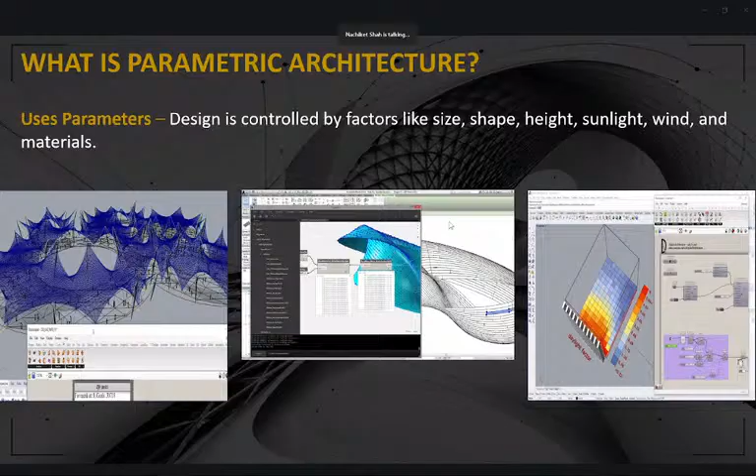So these are basically parameters, and the word itself says parametric. So the use of parameters to function or to optimize my design is what parametric architecture is all about.

Second, what parametric architecture basically uses: it uses rules and algorithms. Now, what are rules and algorithms? For example...

The rules and algorithms work in a way like: from the southern side, if my temperature due to sunlight causes the interior temperature to become 36 degrees, then my model, or let's say the facade, should be designed such that it blocks the sunlight, so the interior temperature should be sufficient and comfortable. That is what rules and algorithms are all about—a step by step series of orders which we give to the model or the trained model that we develop.

This is one of the most key elements, wherein we generate our own rules, we generate our own algorithm to create, optimize, or automate the design. This is the power and function of parametric architecture.

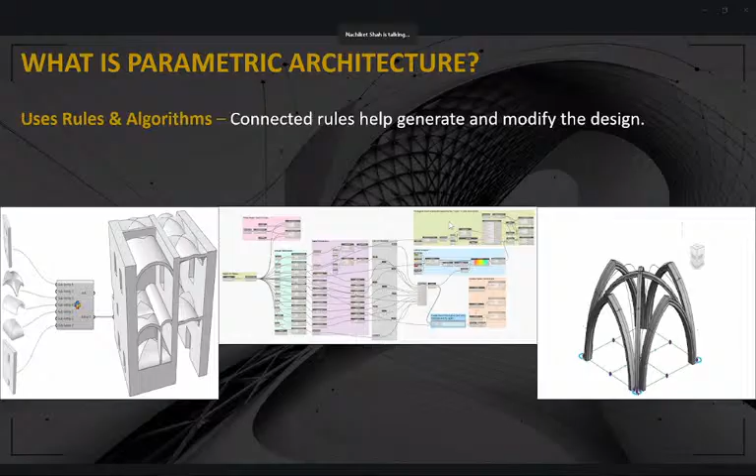Quite fine designs, right? Wonderful, brilliant designs. This can easily be done with the help of parametric architecture, where changing one parameter can change all the other elements.

You can easily see, in the fourth image, the circles. The dimensions of each and every circle are not similar, and the glass facade inside the circle is also not the same in each one—it's not a circle but an elliptical or oval kind of shape. So all the circles or shapes are not even similar; they are basically irregular shapes.

So what do you think—was each and every shape, each and every circle or oval facade, created individually by hand?

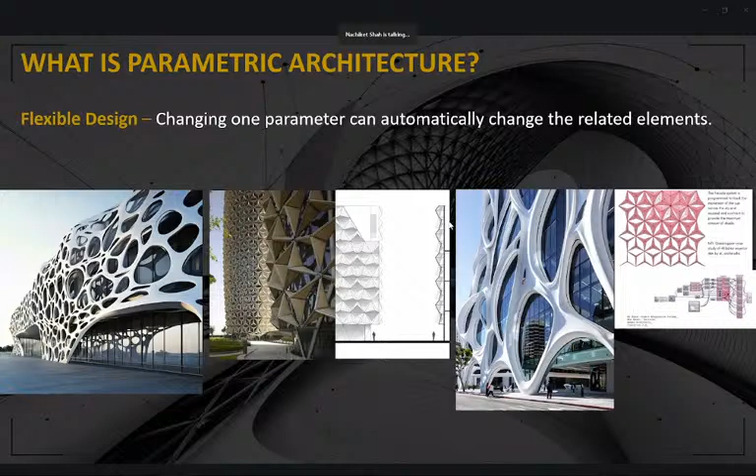Again, it helps in creating complex forms, fluid geometries, aerodynamic shapes. It could be easily served with the help of parametric architecture. So this is what parametric architecture can do basically.

Now this is one of the most key important things, wherein parametric architecture can respond to the environment. Design can adapt to sunlight, climate, wind, views and site conditions.

For example, if the wind is coming from the northwest region, and let's say I'm creating a skyscraper, the flows would be exceeding the 57th floor. You can assume the wind speed at the 57th floor would be much more. So much more structural conditions would apply there, or structural precautions should be provided in that case. But with the help of parametric architecture, we can give an aerodynamic shape due to which the winds can easily pass through without affecting the structure.

At the same time, there's one building in Abu Dhabi, known as the Al Bahar Towers. I'll quickly show you that building and then we can come back. This tower is basically made in such a manner wherein it can collect the sunlight or invite the sunlight from inside the building. This is a live example in front of us, showing they have started using parametric architecture just to suffice their needs. So this is how it responds to environmental conditions.

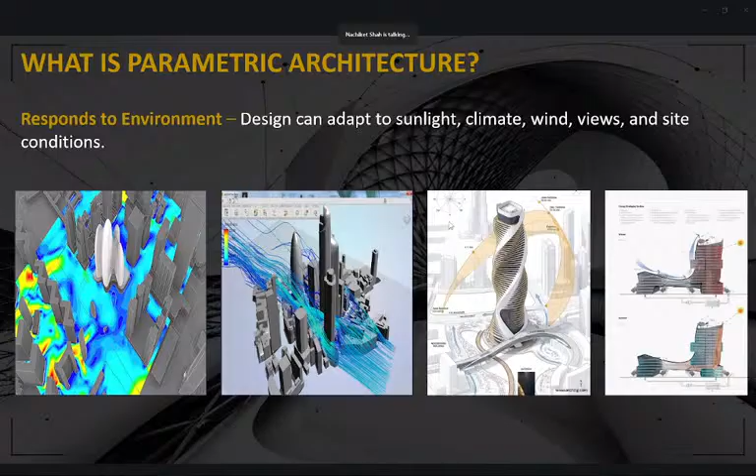Parametric architecture, what I believe, is a beautiful use of space. For example, if I want the optimum use of space, I can easily do it with the help of parametric architecture.

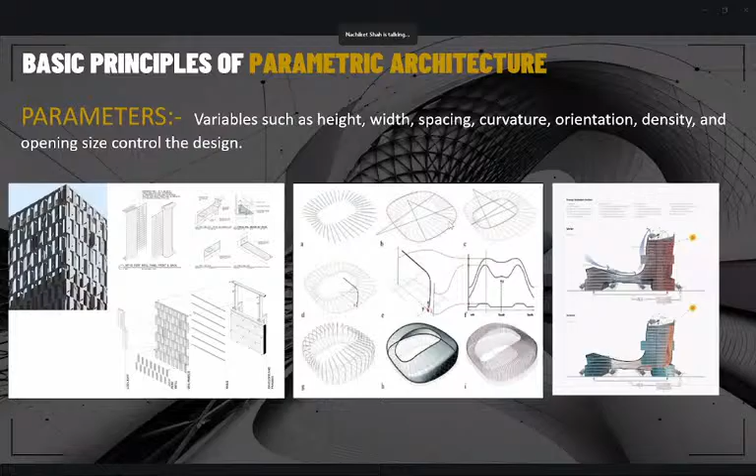So this is the basic thing of how a parametric architecture or this different set of design is being created or curated. Second, we have the relationships. This is what I talked about: the mathematical relationships or algorithmic design relationships is what we can call that.

We have a question, I guess: please describe the density in design.

Density in design, as far as architectural design is concerned, could be in the structural members, whether the panels of the facade, the openings, or shading devices. For example, if the density is higher, more shading fins or smaller openings are provided where solar radiation is high. Where there is lower density, fewer elements or larger openings are used where more daylight and ventilation are desirable.

So density in parametric architecture is very intelligent in terms of distribution, when there is a high density and when there is a lower density, spaces being formed. It can easily be controlled to create spaces which respond efficiently to the environment, and at the same time be efficient in providing the functionality of the space, along with the structural and aesthetic requirements. I hope this answers your question, sir.

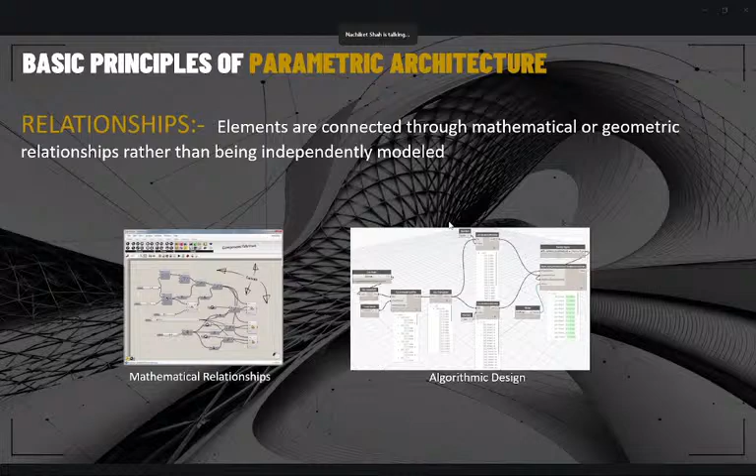For example, the beam is in relationship with the column, and the beam is in relationship with the wall. Of course, I'm not talking about load bearing walls or other types of walls. So this is the essentiality of relationships in architecture, or in parametric architecture, that is important.

So again, we would be talking about what algorithmic design is all about. It is similar, wherein we can create step-by-step geometrical relationships or mathematical relationships which are modeled together rather than modeling it individually. We can always model it in one go. So this is where the optimization of parametric architecture is all about.

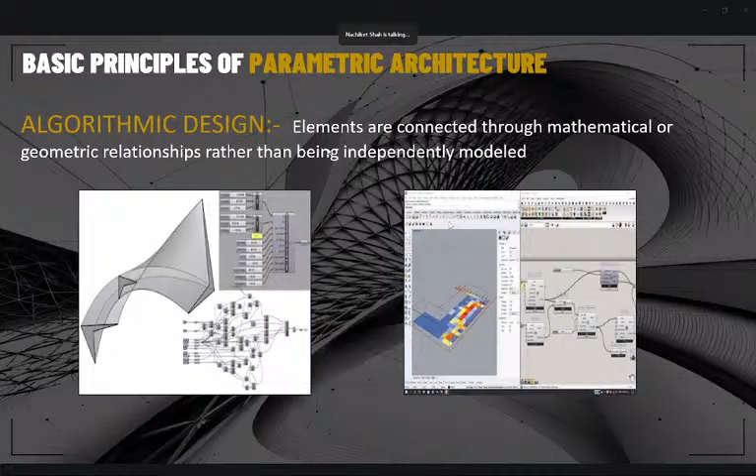Again, now we come to optimization. This is one of the most important things, and architects, civil engineers, and real estate developers are very keen on this optimization, but people are not using it widely in Gujarat.

But we can also get multiple design alternatives automatically in a fraction of minutes. I have created an algorithm which consists of rules and parameters. So just by changing the values or the rules, or adding new rules, I can get a complete new design. This is how we can get multiple design alternatives.

This is what every architect or designer needs, since clients always ask for more and more. So this is where optimization, wherein multiple design alternatives can be achieved, comes in. It is always said that if I don't know what is more, I can't acknowledge what is best. This is what I can do with the help of parametric architecture.

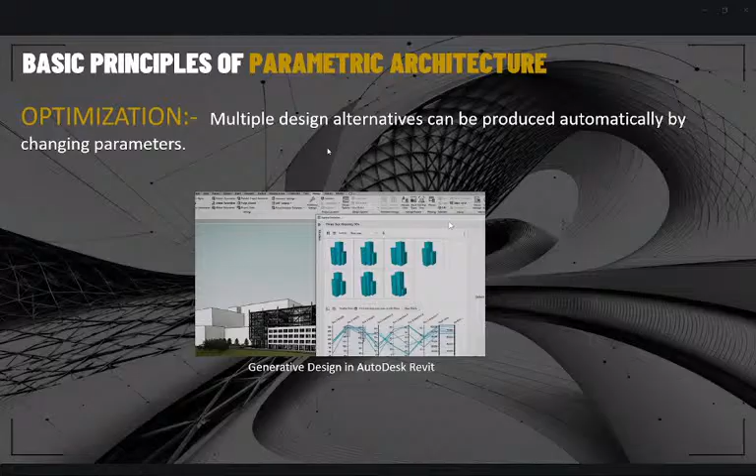So again, we have associative modeling. For all the structural engineers and civil engineers in the house, whether they are related to the AEC segment - which stands for architectural, engineering and construction - or from the PDM segment, which stands for product designing and manufacturing, all are in need of this.

So I would urge all the professionals and students in the house to switch to parametric architecture, because this is something wherein you can automate your drawings rather than doing it the old way.

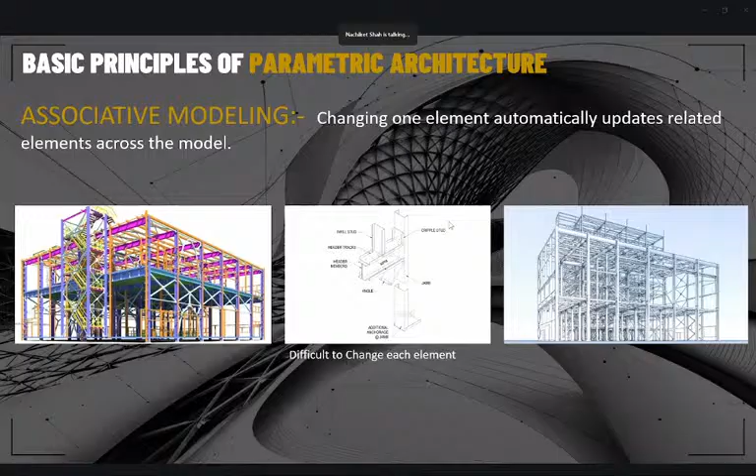Okay, so we have the associative modeling. Second, again, geometric complexity - it can easily be achieved.

Now this is one of the most important things: data-driven optimization. You can also see wherein I already answered the question of sir Goswami, whether I can identify the moment, the shear force, or the bending moment from the same. So yes, you can very well do that, but you should feed the data in. So it's not just that it can provide me with structural efficiency.

At the same point of time, for example, if I enter the wind data or the data related to wind speed, wind velocity, and everything, it can say whether my structure will sustain or it will not sustain. So this is what we can do - data-driven optimization through parametric design.

And yeah, there would be certain engineers who would say this could also easily be done in STAAD Pro or Tekla Structures. Yes, it can easily be done, but I'm not talking about Tekla Structures because it is a parametric software. If I'm talking about STAAD Pro, STAAD Pro is a structural analysis software wherein it can only say that you have a problem and your structure will break.

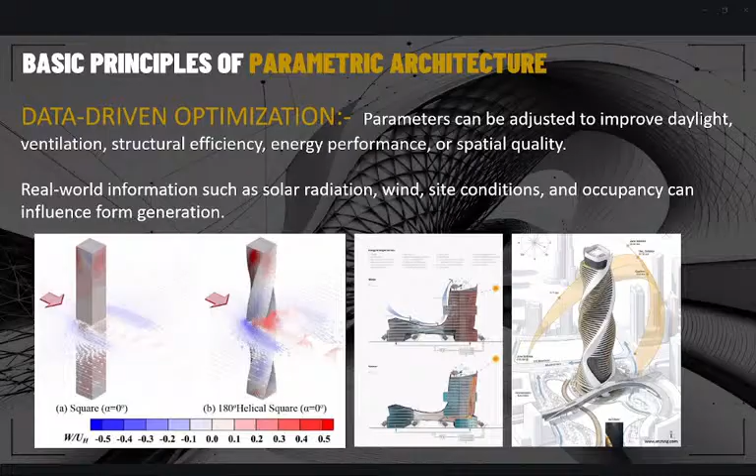So now let's come to what a parametric design process should look like. For example, let's say we encounter a problem at our side - let's go with the same example I took earlier, that I have created a 57 floor high rise structure wherein I'm encountering two different problems.

The first problem is that I'm not getting a proper wind flow in the same, and I'm not getting proper sunlight. I should get proper sunlight in my space, and the building should not be affected by the wind flow. Yeah, obviously it would be affecting at a certain extent, but it should not affect to that extent if I create just the standard size.

So this problem has been encountered by us. First of all, the first design process is you need to encounter the problem. Second is you need to feed in the data. Feeding the data, when I say the data, it would always be in relationship with the parameters. So you need to identify the parameters - what are the parameters which are basically required? This should be done by the designer's end.

For example, I should understand what should be my wind flow, what should be my sunlight or daylight which has been entering or invited by the building. So once the data has been fed, then you need to create a certain set of rules. Rules in what sense? For example, if my wind speed exceeds from X to Y, or my daylight...

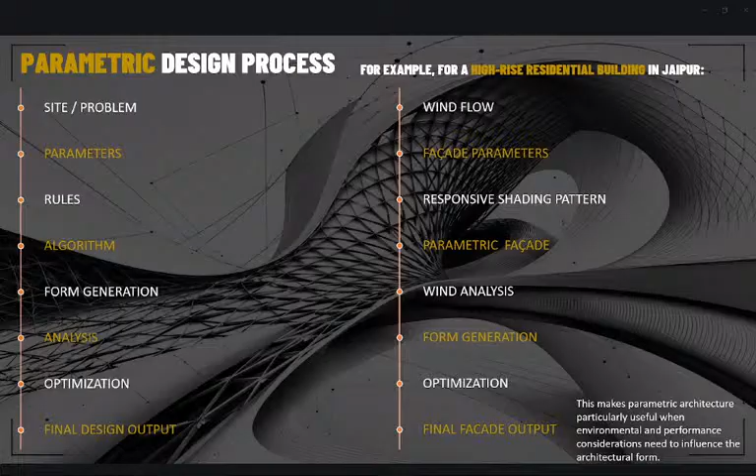Again, optimization after the analysis - by changing the parameters, just by changing the data which we have fed it, we can get different sets of the output. So this is what the complete process of parametric design is all about. I hope I made it clear.

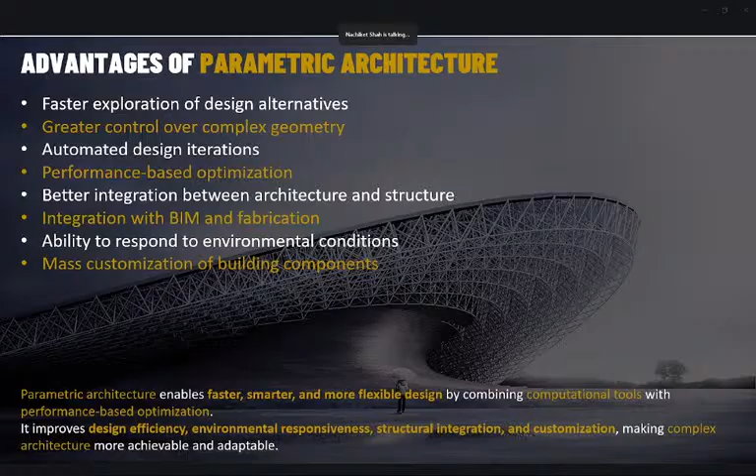So now what are the limitations of parametric architecture? One limitation is that the software requires a numerous amount, and the software is not cheap. It requires good and adequate knowledge of computational design, and also a basic and good knowledge of C and Python.

In certain cases, if an adequate amount of data has not been fed, it becomes unnecessarily complex. Again, it requires powerful software and hardware for large models, and the construction of parametric architecture may be expensive.

A visually complex form does not always mean good architecture. We have a building in Vadodara itself - I'll not name it - which claims to be formed with parametric architecture. I visited it once and passed through that building, where I encountered no daylight entering due to the complex facade. The daylight has been blocked, and due to this, the corridors in the afternoon require artificial lighting. This is what bad data fed can lead to.

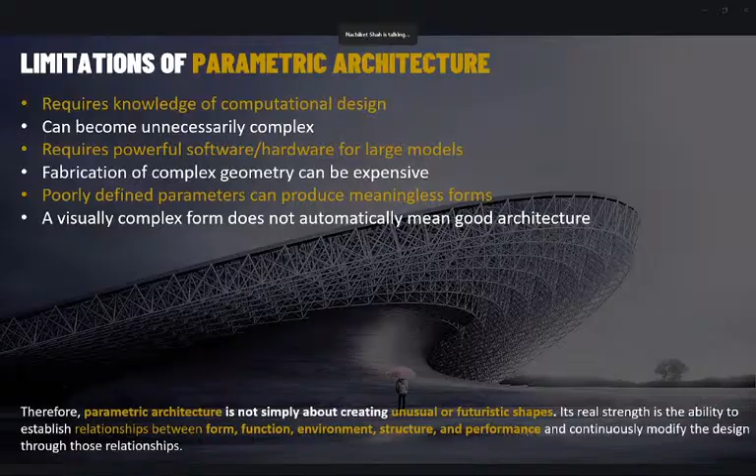Second, now this is what our topic was all about - the main crux of our topic: why sustainability in parametric architecture? What is the need for sustainability in parametric architecture? How can sustainability be easily achieved or optimized, fully achieved, through parametric architecture? So this is what it is all about.

First of all, we have limited resources which are currently available. It is said by our very learned professionals that sustainability begins at the design stage, and it does not begin after construction. Again, parametric architecture uses data-driven parameters to make informed design decisions.

Every design is chosen and optimized for environmental performance. With the help of parametric architecture, the optimum material required is achieved, and it reduces construction waste. This is because parametric architecture is so accurate - though again, I would consider that an adequate amount of data should be fed inside the scene.

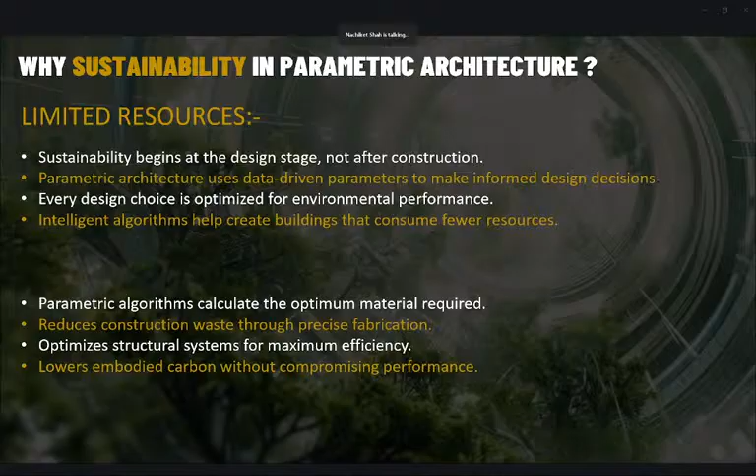One of the key reasons we should use sustainability in parametric architecture is that the building segment or real estate segment is one of the largest contributors to environmental problems. Construction accounts for around 40% of global energy related to carbon emissions. Again, it consumes a large amount of electricity, water, raw materials, and at the same time, construction also generates a massive amount of waste.

This means architects have a major role in reducing environmental impact through better designs. But to practice sustainability in architecture requires a lot of time. So with the help of parametric architecture, we can easily automate sustainability along with parametric design.

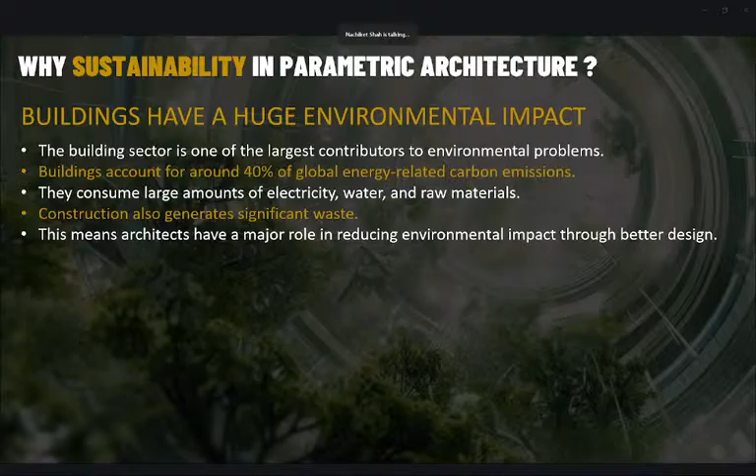Again, climate change is a reality that we are all suffering. The floods we are getting in Gujarat these days - if we look at Surat, if we look at Ahmedabad, if we look at the Valsad regions - the floods have hit massive structures, the temperatures are exceeding, there is extreme heat in summers. It is very difficult to go out in the afternoons.

So this is why sustainable practice is adequate or required. It basically helps in reducing energy consumption and lowering greenhouse gas emissions. Again, it can also provide a better quality of life. So sustainability is not just about protecting a forest, planting trees, or creating a green building or green facade - it is also about improving people's lives.

If the physical health of the people is not achieved, then there is no need for sustainability. One way we can address this is by also including better indoor air quality.

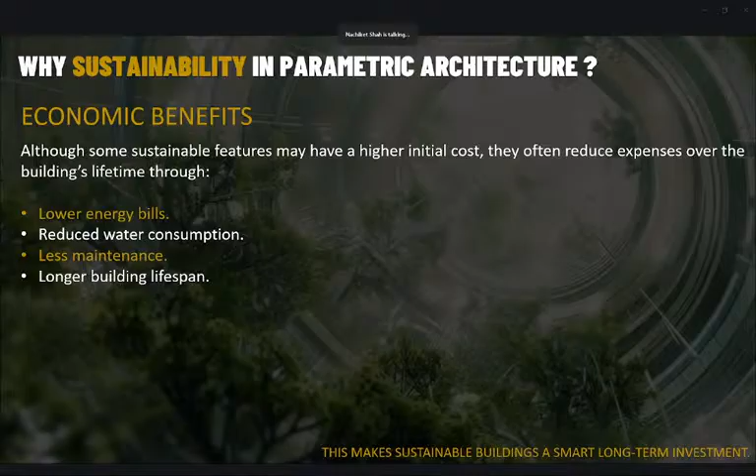The construction cost of parametric architecture is high, but at the same time the after-cost is less, including lower energy bills, reduced water consumption, and less maintenance compared to traditional buildings. The lifespan of such a building is longer than traditional building systems. With the help of all these things, it makes a building sustainable, smart, and a long-term investment.

So again, the question arises: how does parametric architecture support sustainability? It allows architects to test and optimize multiple design options before construction. Why should I encounter a loss when the technology can already predict the outcome? When the technology tells me there is a failure here, why should I construct that building?

This is where parametric architecture allows you to get multiple different sets of designs. It helps in building the best orientation for sunlight, optimizing facade designs to reduce heat gain, improving internal air ventilation, minimizing material usage, and predicting energy performance, as I talked about earlier.

Government and organizations around the world, whether LEED, IGBC, or GRIHA, the majority of government-certified or international organizations are becoming very common, and they are certifying buildings. So it can be said that sustainability is no longer an option, it is becoming an industry standard.

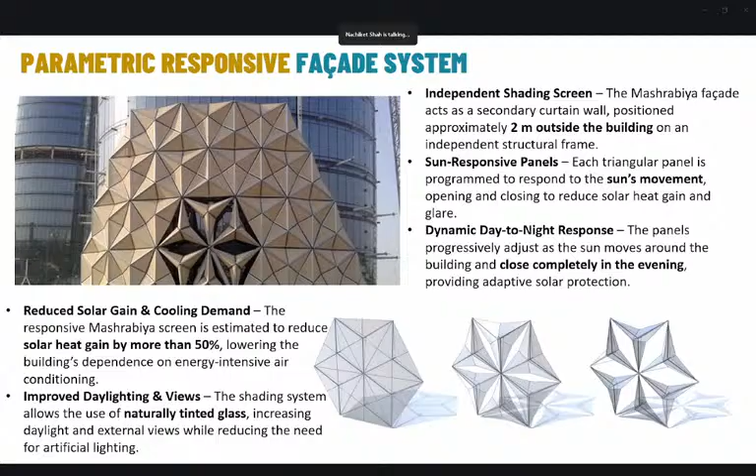Again, it helps in improving the daylighting and the views, and at the same point of time, you can also get an aesthetically appealing view as well.

Let's say if I create a normal box system, though it is very easy to construct, it does not look like this building belongs to me. The reason good architects are paid in a very high manner is just because they curate or articulate the spaces in such a way that it makes the space feel like it is my space, or the space of the customer. So that is where the role of an architect comes into place.

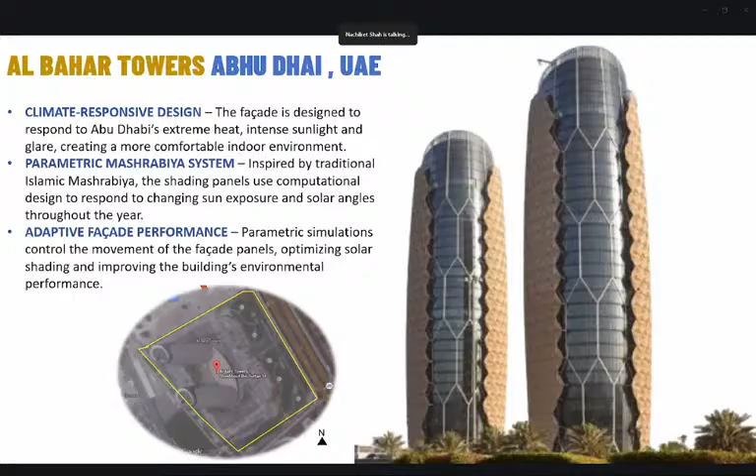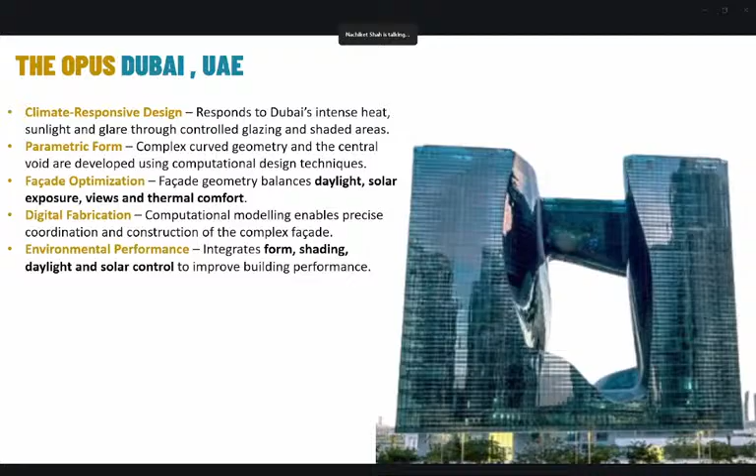Again, digital fabrication and computational modeling have been done. It integrates the form, which provides shading from the daylighting, and helps in solar control, which helps in the improvement of the building performance. So, with this, we end today's session.